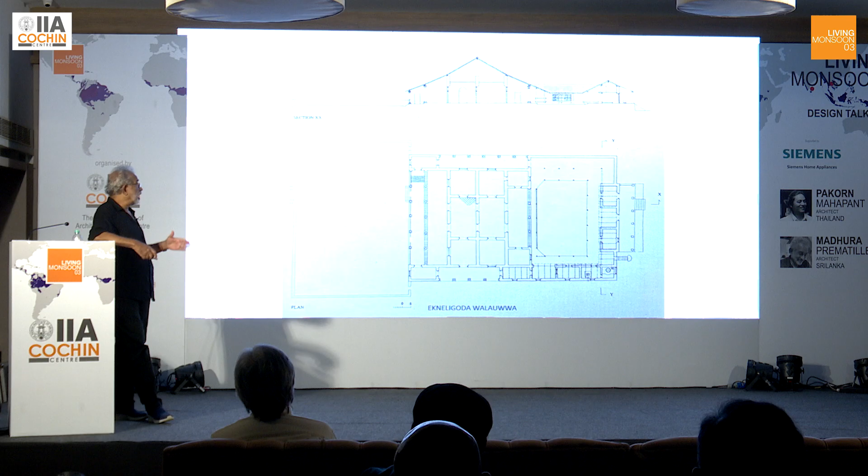This is the Walauwa, this is probably from the 17th or 18th centuries. This is the Ena de Silva house by Geoffrey Bawa in the 1960s. Again, the ancestor and the descendant. You can see very clearly where the inspiration flows from. The two sections, you can see the comparison of the umbrella roofs and the courtyards, the big ones and the small ones.

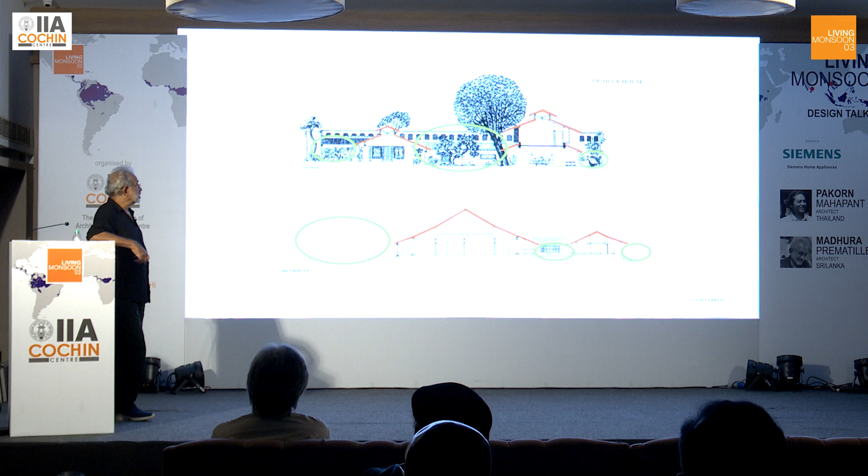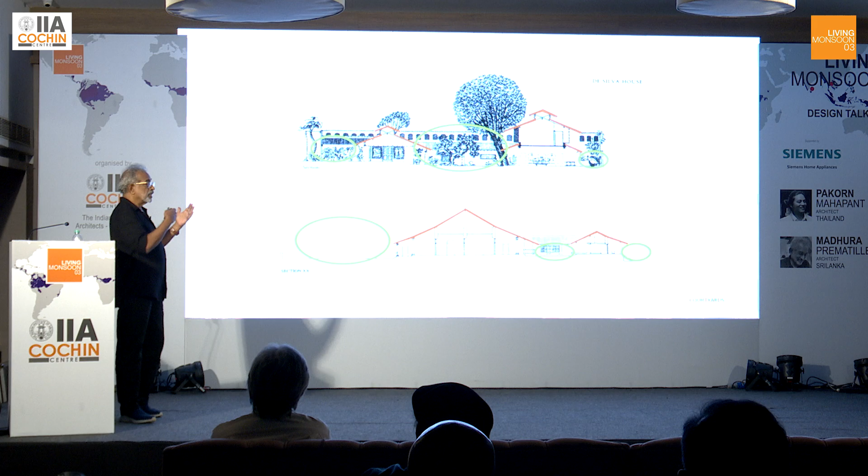So the entire ethos of architecture, of climate, of response to climate, of lifestyle, everything was drawn from these two elements of the umbrella roof and the courtyard. When I started to practice in the 1990s, my sites were about that much.

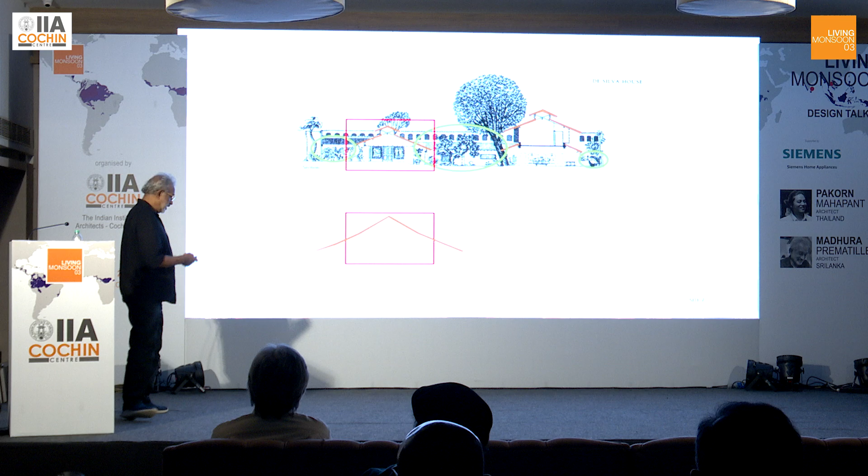I didn't have space for this umbrella roof, because the umbrella roof must not only have space for itself, it must have visual space to flow beyond. I had another problem, which is that the veranda is a beautiful inside-outside space. It protects, it cools the house. But it is also, we forget, dark and damp. Most of our traditional buildings are dark and damp.

And 70% of the medical problems that rural people have in Sri Lanka comes from living in damp houses. In tradition, they say that you must light a hearth inside the house for 2 weeks before you go into occupation to chase the devils away. The devil you're chasing away is the humidity.

So I found that when you introduce a veranda to a small building, which is what I was designing, the interior space became very constricted. Also the open courtyard, as Bawa was able to use without any doors and windows, means allowing not only a little bit of rain, but also all the rodents and animals to come in from one side and go out the other, which means you need staff and maintenance ability to keep it looking as good as it does in this picture. Now my clients didn't have any of that, so I had to look elsewhere for inspiration.

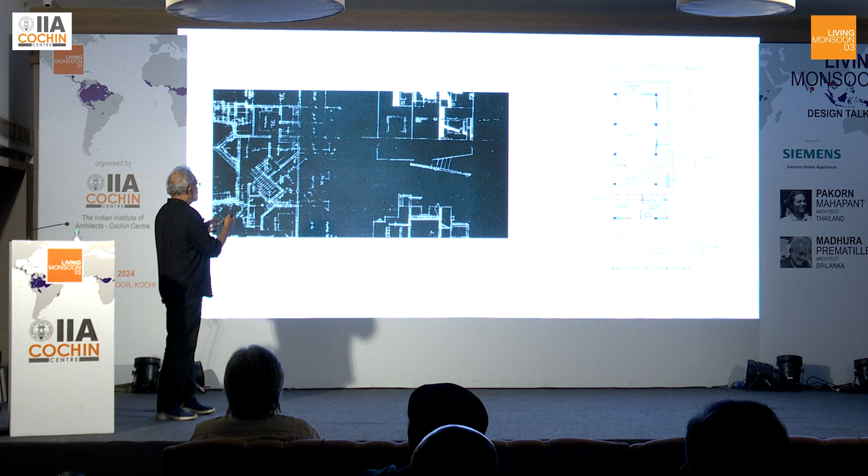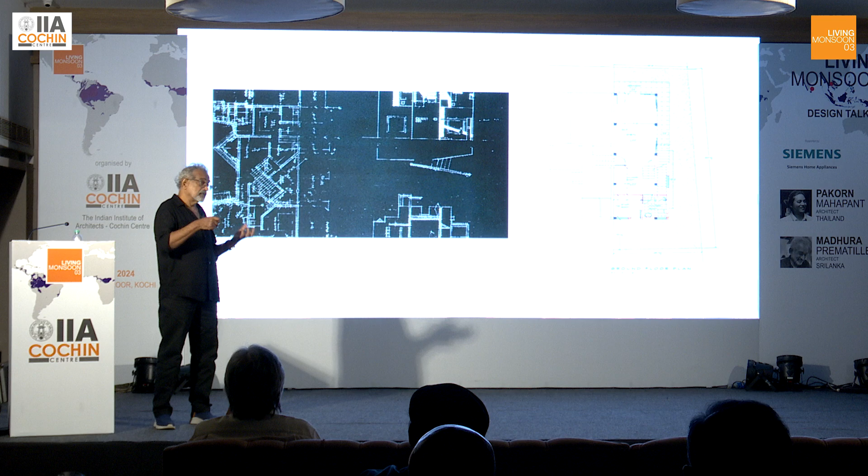So my work was beyond the umbrella and beyond the courtyard. Early work, I struggled with the idea of building compact spaces, small spaces which had to deal with the climate and the brief and small sites. First time that I really found a direction to move was in this building called the Longhouse, which was built in 2002. It was a long, narrow site.

I had begun to practice certain ideas in the smaller sites, but in this, which was a longer site, a bigger site, I was able to express these ideas more clearly. The idea of a linear building, which does not need to rely on the umbrella and does not use the courtyard, but the linearity of the garden.

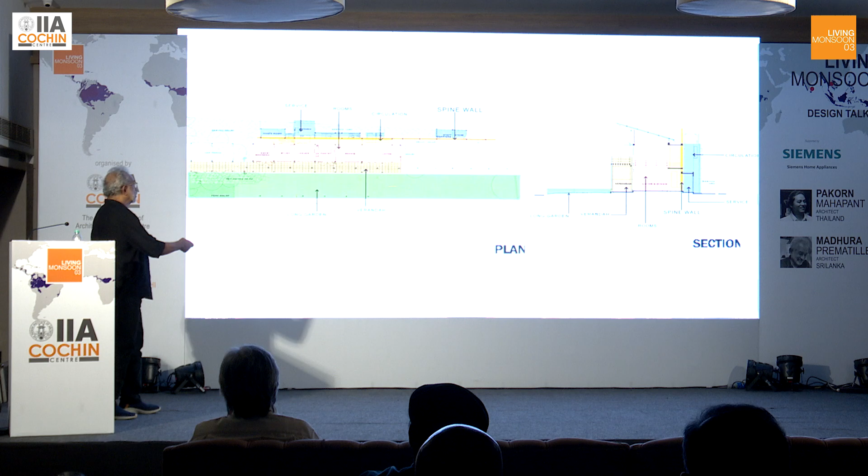So we have in this several linear elements. There's a linear wall which runs through the whole building, which separates the service and the served elements. The yellow is circulation, the orange are all the rooms, and the brown is a veranda. Then it ends in the long garden, which is the green, which you also see in the section.

So the roof is present, but it's hovering above. It does not come down. And raising the roof off and facing it in the right direction allows the light to come in.

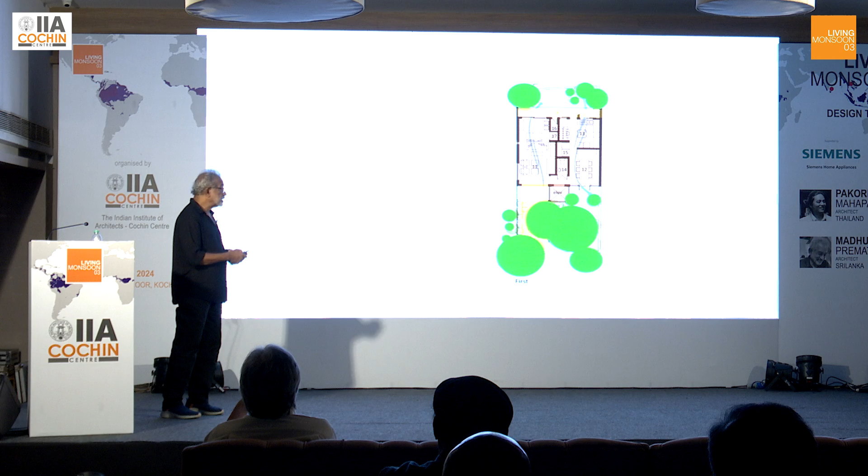And the building is thin and tall, and it allows - it's single bank, so it allows the air to pass through. The staircase is more than just a means of going from one floor to the other. It's single flight, so that it opens on each side to the east and west. So you get the sun bouncing off the steps at different times of the day.

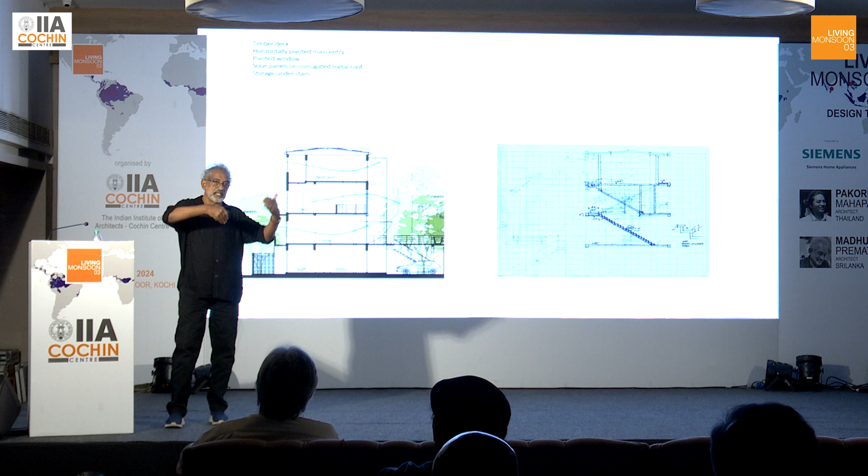The main living space is on the upper level, so that the ground level is freed for mundane things like parking, and now my studio, my office itself resides there.

This way of relating to the deck is very important, because it extends the living space outside. It's a pivoted, counterweighted screen which opens up to connect the inside and outside. When open, it becomes a canopy for both sun and rain, and when it comes down, it becomes a screen which frustrates mosquitoes from getting in.

The rooms are fairly narrow, 2.7 meters, 9 feet wide, which is my idea of how to build small and consume less.

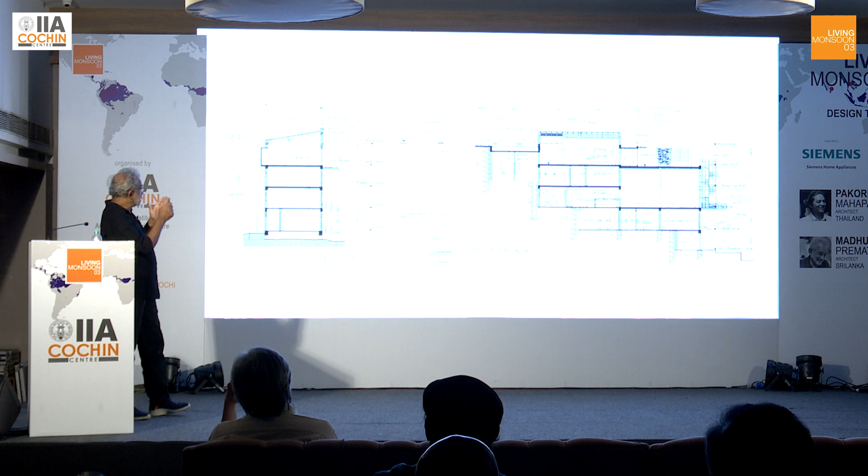This house uses some of the same ideas—again, building on very little of the site. It's on a very large plot, but the buildable area is limited, and we chose to build on less than half of it, so the house is a very thin sliver which steps down six levels, following the hill and the contours.

So at the entrance, you barely know that there is a house, because the rest of it goes down, and then it begins to emerge from the landscape.

This idea of building very close to the big trees is something I learned from the late Lucky Senanayake, a wonderful landscape designer and artist. If you build close to the trees, you get the advantage of screening, and you don't have the problem of the tree blocking your view. The tree basically frames the view, while giving you protection.

In these houses we have all these screens, and I'm an unabashed user of glass, because I believe there is a way to use glass in the tropics—by screening it out, adding balconies and pergolas and various elements which protect and help use the indoor-outdoor space.

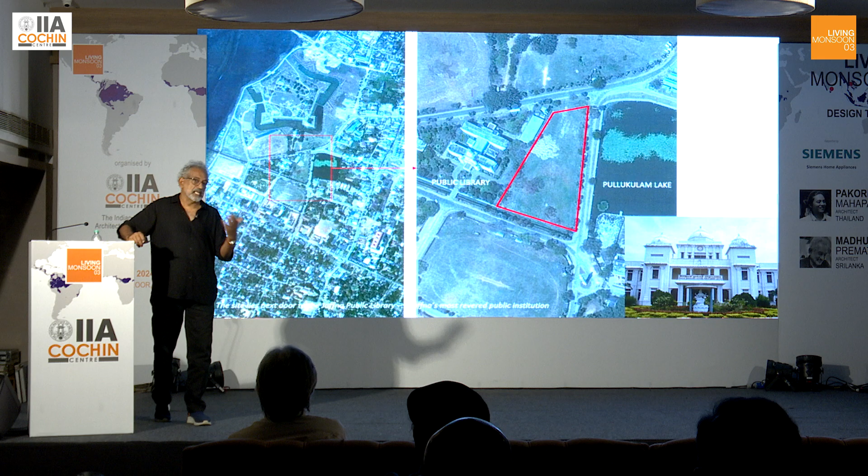The site is located in a very important place next to this building, which is the Jaffna Public Library, Jaffna's most revered public institution, because the people of Jaffna have very great respect for education and knowledge. So this public library is treated like a temple, and people take their shoes off when they enter it.

Our site was located right next to it, so the primary response had to be defined by building next to this much smaller but much more important cultural icon. Our first gesture was—this is our site here, it comes right up to here. This is the public library next to it.

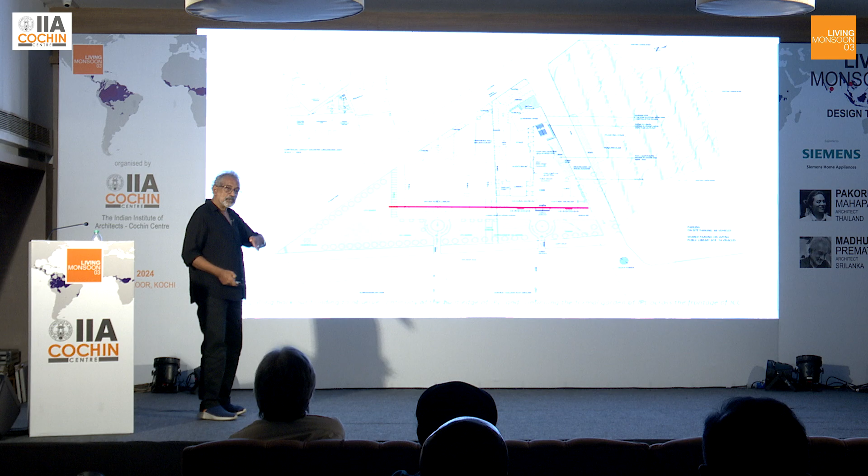So our first gesture was to pull back our building up to the facade, the front of the public library, and then to extend the garden of the public library right across our front. Basically, we were pulling ourselves back to fall in line with the public library.

And then we introduced this facade, this colonnade, which observes the scale and the rhythm and the material of the library. It doesn't observe the same details, but it observes scale and rhythm, so that when you stand at the entrance, it appears like the public library is extended across the front of our building. You do not see our building—this is the formal entrance. You see it like an extension of the library. These are the two frontages for comparison.

The idea was to be secondary in that position to the library.

The design was selected via competition, which was conducted by the High Commission of India and the Sri Lanka Institute of Architects. And what we tried to do was create a contemporary building, but which was inspired by the traditions of the region.

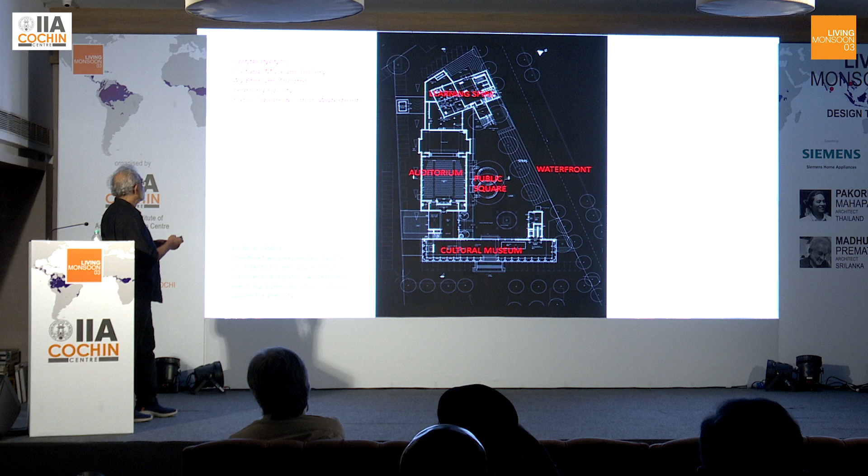There are three built elements in it: a cultural museum, auditorium, and a learning spire, all arranged around a public square and next to this waterfront. This public square was not part of the brief—it's something we introduced to create a public gathering space, because it's a public building, and we felt that without a public open space, it had no relevance.

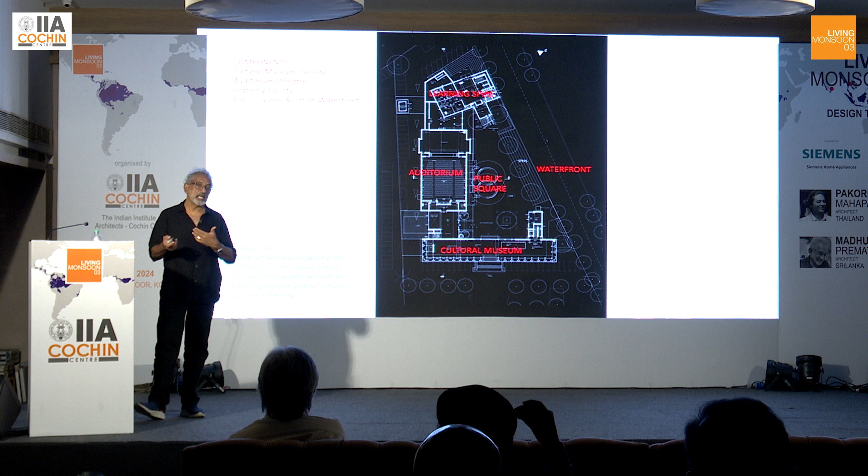The base is on 3 levels, and then there's a spire which goes up, as I will explain. The first building is the Cultural Museum, which is what you see here, and it is the formal entry to the building. This is the colonnade—you can see the presence of the building next door being extended across.

Our building is behind this facade, and it rises up behind it, which is a completely different material—it's steel and glass, while the colonnade is white masonry. The two are separate; there's a physical gap which separates them. So it is very clear that we are wearing a respectful garb in the presence of the respected building next door.

This forms the formal entry, and it is also a public exhibition space, and it opens to the courtyard, the public square at the back. It has 3 levels with open exhibition spaces and an enclosed museum on top, and it is topped by a dome, which is an echo of the dome of the public library next door. Under this dome is the main exhibition space of the museum.

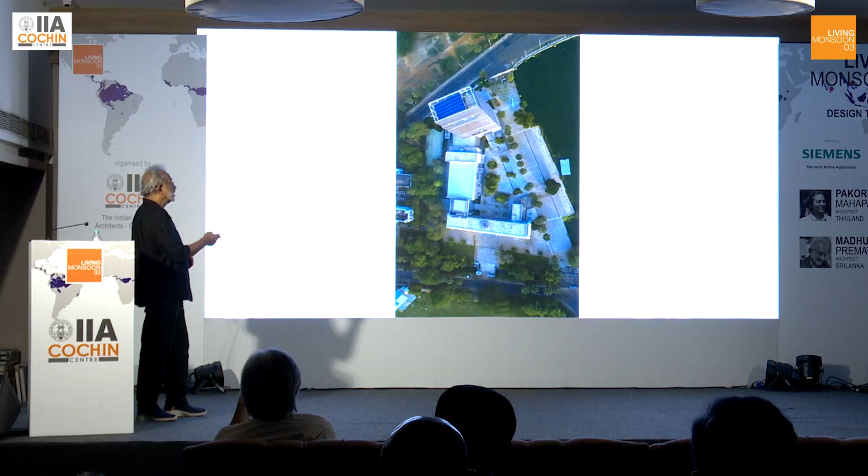The public square itself is a very critical part of the design. All 3 buildings have their public entries from the public square. This is a former vehicle street which was pedestrianized to create a promenade next to this lake, with public entries through this, and then entries from the public square into each of these.

This public square, this particular location, is remembered—it has a very strong place in the memory of Jaffna because there was an open air theatre, a small amphitheatre here before the war, where they would hold classical music concerts very often, and it was part of the memory of the city.

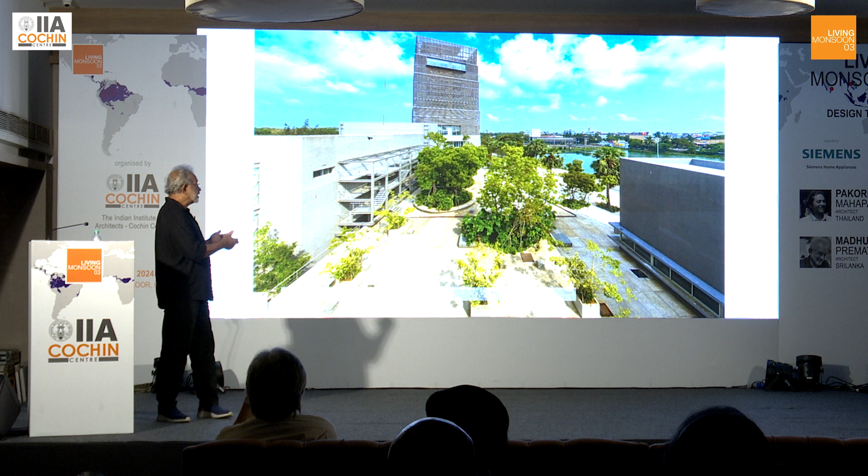So we wanted to create a public activity space in that very same spot. We planted 100 neem trees to create shade, because it's a harsh climate during the summer months.

And on the blank wall of the auditorium, we introduced this art wall, the idea being that artists could display their art and people could walk up these platforms and engage with them.

The square then steps down in form to create an amphitheatre, a performance space, first on the street here, and then it steps down to the lake where there is a floating stage.

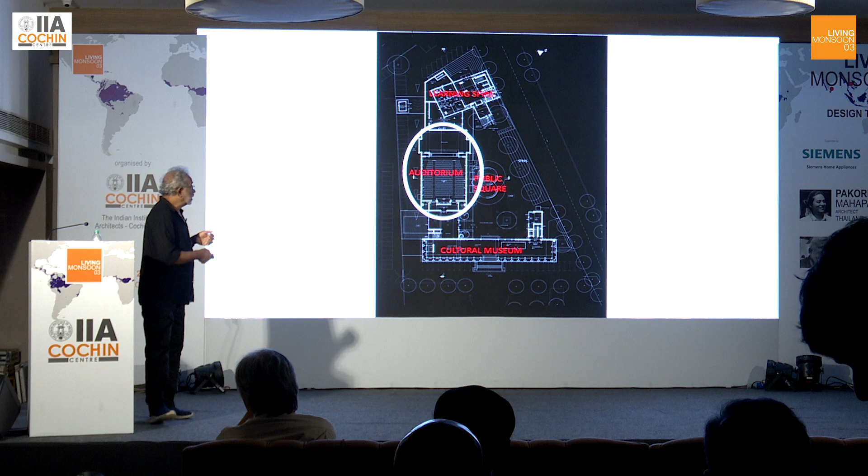The auditorium is a 600 plus seat facility. It has limited depth because it's designed specifically for a type of performance where you need to see the facial expression of the performer, like Bharatanatyam. So it's a 23-meter depth but wider.

And the acoustic walls of the auditorium carry a special motif, the pattern of the Palmyra leaf fence, which is the most frequently seen, most well-known urban feature of Jaffna. So when you sit there for a while, this pattern slowly begins to become evident.

The building was designed to contain learning facilities for the arts. So studios, conference spaces, teaching spaces and so forth.

The idea being that if there was one building which was going to be prominent here, it should relate to the same ideas as the public library, the idea of education and knowledge. So there is the old icon, the public library, and the new symbol, also to do with learning. Therefore, the learning tower.

A base level of 3 floors, and then about 7 or 8 floors above that. The floors are open on their longer sides, so that it allows the sea breeze to pass through.

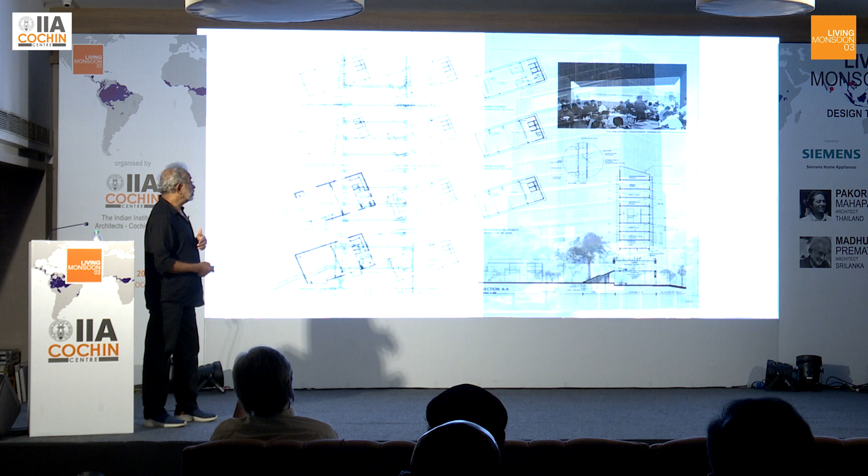So the building on more than 7 floors is completely naturally ventilated, and it is wrapped around by this timber screen, which screens the sun, allows the breeze to pass through, and creates these patterns which move across each floor. As a result of the screen, it also allows the views.

These solar panels on top of the roof can be used for 70% of the power requirement of this building, because it makes maximum use of natural light and ventilation.

The screen itself was made of 3 meter by 3 meter panels, so that it could be fitted from inside. So there was no scaffolding required to erect this on 13 floors. Each one was fitted as a 3 meter panel from inside. And if it is necessary to repair or replace it, it can be done the same way. The inspiration for this tower, for this building, we have drawn from the Hindu architecture of the region.

For example, the learning tower is influenced by the idea of the Gopura. The entrance steps to the learning tower are derived from the idea of the Ter Murtipadi, the chariot house steps. And of course, the steps down to the lake are inspired by the steps of the tank.

The IIA Cochin Centre envisioned a platform to showcase the architectural innovations of monsoon regions. The Monsoon Architecture Festival was born, a global stage where design meets the challenges of rains and fluctuating climates. The monumental 10th anniversary is here. The 2025 edition promises to be the most ambitious yet.

800 plus architects from across India, 50 plus speakers from around the globe, 50 plus subject matter experts sharing deep insights, 15 plus award-winning architects from monsoon regions, 100 plus special invitees. Join us on March 28th and 29th at the Grand Hyatt Kochi for a celebration where ideas flourish, boundaries dissolve, and monsoon-inspired architecture takes center stage.

Prior to that, we will also be conducting the Monsoon Architecture Awards, the third of our series. Our categories are as before: category 1, single family residence; category 2, multifamily residential; 3, leisure and hospitality; 4, institutional and workplaces; and 5, public spaces.

We've also added a competition category this time. It's titled the Monsoon City, a placemaking competition set here in Kochi itself. All of these will soon be opened up for participation, so please be generous in your participation, and God willing, it will all go well. Thank you and have a good rest of the evening.